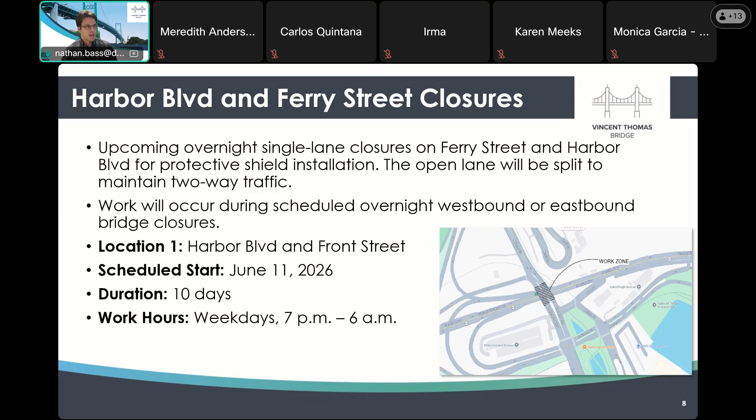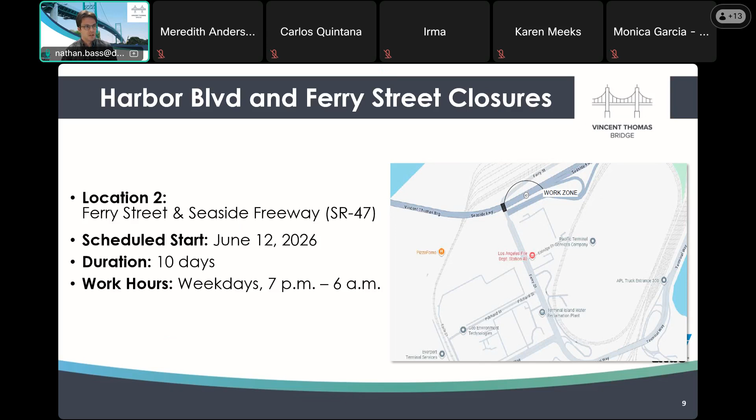The second location is Ferry Street and Seaside Freeway, or State Route 47. The scheduled start date for that is June 12th, also a 10-day duration, weekdays 7 p.m. to 6 a.m. That's for installation of the underbridge protective deck.

Tonight we are announcing the initiation of a residential air purifier program. The purpose of this program is to serve as a measure to provide community support to help address temporary air quality impacts during the bridge closure. The program is intended to provide eligible residents with a household resource during construction and reflects Caltrans' commitment to supporting surrounding communities throughout the project.

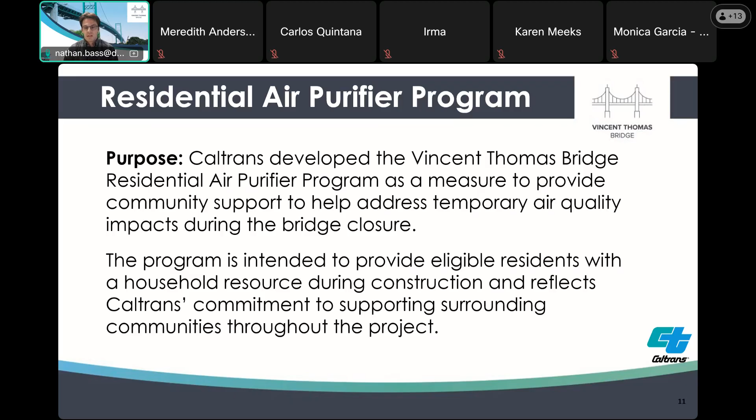The area surrounding the Vincent Thomas Bridge project is already identified as a sensitive area due to air pollution, and it's suspected that detour traffic on local streets could contribute to potentially more air pollution during the bridge closure. So Caltrans, as mitigation for this project, will be distributing or at least offering air purifiers to residents, as well as replacement filters that will last through the duration of construction, to those residents who live within a specified distance of the designated detour routes for this project.

The detour routes may increase activity on local streets surrounding the project sites, and we will provide Medify MA40 air purifiers and replacement filters to eligible residents.

On the right side of the screen is a postcard that will be sent to eligible residents, which we've identified using GIS mapping and available address data based on the designated detour route for this project. Three of these postcards will be sent out over the next several months, and recipients will be encouraged to find our project website or the registration website for this program, sign up, and pick up an air filter from our construction office, located within the project area near these neighborhoods.

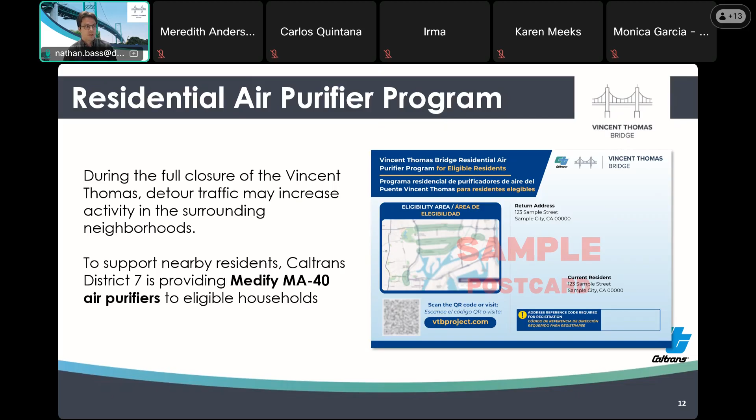Here's a map showing the eligible areas for air purifiers under this program. It is all of the residential addresses within those green bubbles surrounding the local streets and our designated detour route. The main streets that jump out are Gaffey Street down in San Pedro, and in Wilmington, Harry Bridges Boulevard, Alameda Street, Anaheim Street, Wilmington, and East I Street. Folks from Caltrans District 7 Environmental can correct me, but I believe it's about 750 feet from the detour route, which creates this boundary for eligible households.

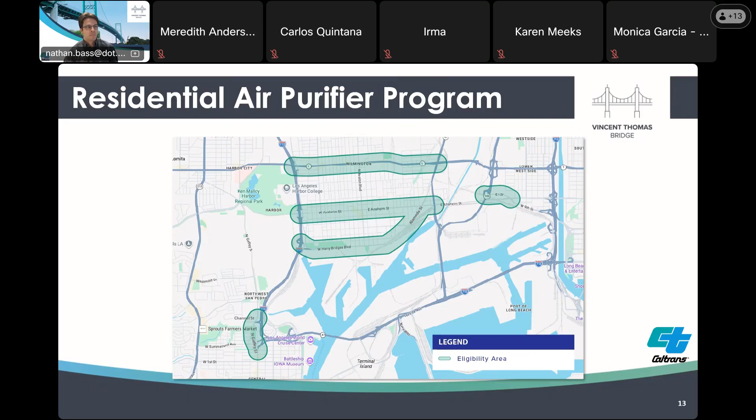So I'll pass it to Rimma to discuss the project schedule.

Thank you, Nathan. As you may remember, Caltrans launched this project in February of 2023, with the environmental phase completed in fall of 2024 and the design phase completed in fall of 2025. We signed the construction contract with Skanska CEC joint venture company this past January, and now we're fully in the construction phase. Construction work is divided into three parts: pre-full closure, full closure, and post-full bridge closure. Pre-full closure work began on March 23rd, and we are currently on target to complete it by late October this year. The 16-month full closure remains set for November 1st, with the bridge scheduled to reopen in winter 27-28. The post-full closure is scheduled from winter 27-28 through winter 28-29.

Next is Andy Chen, our structure construction senior engineer, to talk in detail about this schedule. Thank you.

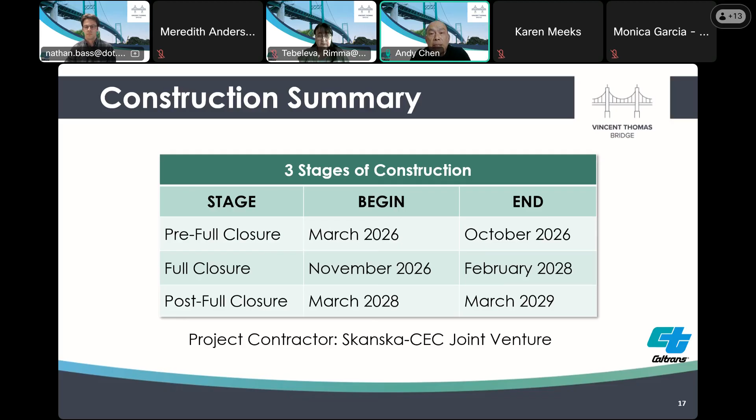Here are some of the major activities we are doing now during the pre-full closure. First, we're installing the protective shielding, which protects the people underneath the bridge and the waterway. We're about 40% finished with this item. We're also installing a work platform, which provides under-deck access for the workers. This will start around July.

We're installing 2 temporary stair towers, which increase the workers' access to the bridge. This item is already completed. For the structural bracing, which maintains the stability of the bridge, this will start next month, June. As for local road improvement, this is one of the major works for this stage. We don't have the timing yet, but we will finish this item before the full closure.

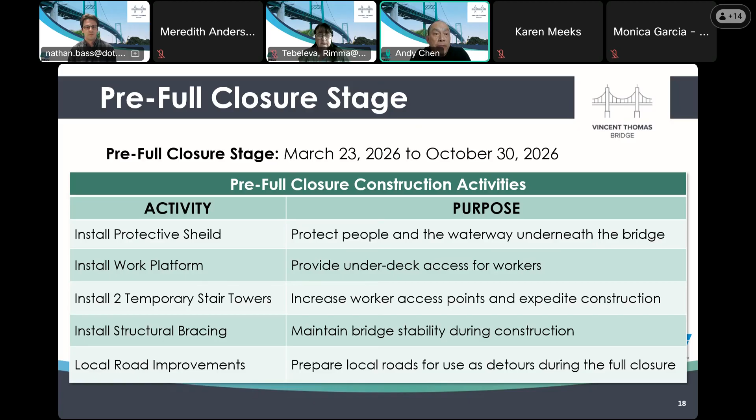Here are some of the impacts during the pre-full closure. Some of you already experienced this. We'll have overnight one-directional bridge closure from Sunday night to Friday morning. But this week we will have an additional Friday night closure, starting the week of March 23rd.

It's Monday to Friday, and westbound will be from 10:45 p.m. to 6:45 a.m., and eastbound will be from 10:15 p.m. to 6:45 a.m. There will also be potential weekend closures depending on the progress of the work. And local road closure mid-July to October 30th, 2026 — we will provide closure notification through email.

Here are some pictures showing the work we are doing right now. Those are the protective shielding I was talking about earlier. Again, we have the one-directional bridge closure, and we are doing this work during the night shift.

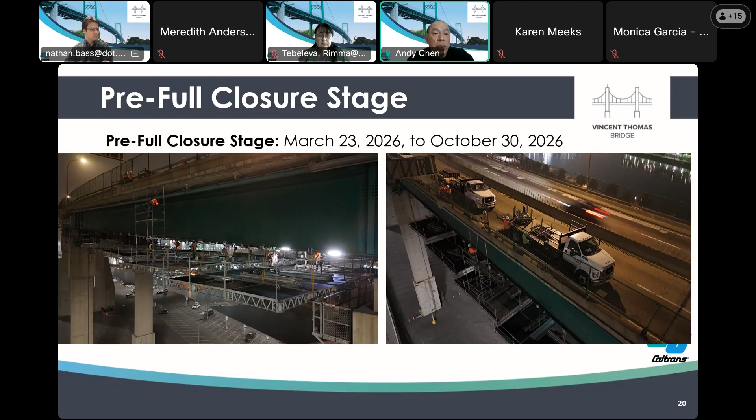Here's the sequence for how we install those quick deck or protective shieldings. First, we assemble them on the bridge deck. We lift them up until we reach a certain area, then hand it over around the bridge and install it underneath the bridge.

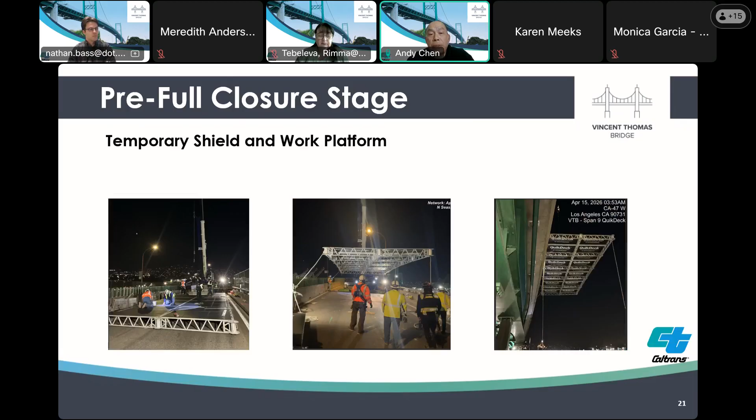Here are some more pictures about the protective shielding we have right now.

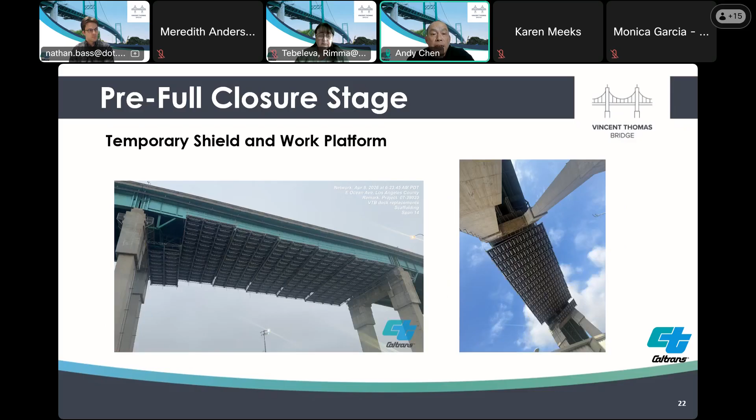And that was for the pre-full closure.

Now we're going to talk about the full closure stage. This stage is for the deck replacement. It will run from November 1st, 2026 to February 28th, about 16 months. Right now, so far, everything's on schedule.

We still anticipate we will start full closure on November 1st, 2026. Once again, during full closure, the entire bridge will be closed, 7 days a week, 2 shifts per day.

Here are the major works we are going to do during the full closure. First, of course, we're going to replace the bridge deck. We're going to reconstruct the bridge railing, reconstruct the median barrier, reconstruct the drainage, replace the seismic sensors, and reconstruct the overhead signage. All of this work will be done in 16 months.

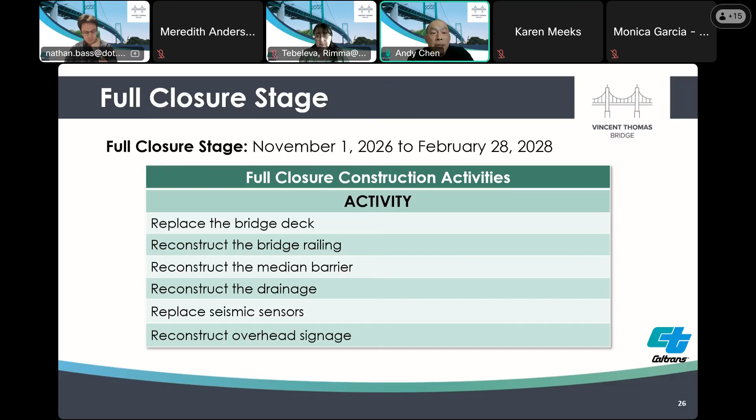And that was for the full closure. Now we are going to the post-full closure, which is the last stage of construction. For the post-full closure stage, you start from March 2028 to March 2029. There are 2 types of work: one is permanent work, one is temporary work.

For the permanent work, we're going to install the permanent under-deck utility support, and hang utilities on those supports. We're going to complete some of the punch list items and install a new drainage system at the seismic joints. That's for the permanent work.

As for the temporary work, we're going to remove all the stuff we installed during the pre-full closure stage, such as the access platform, protective shielding, stair towers, and temporary structural bracing. So those are the major work items we are going to do during the post-full closure stage. Next slide, please.

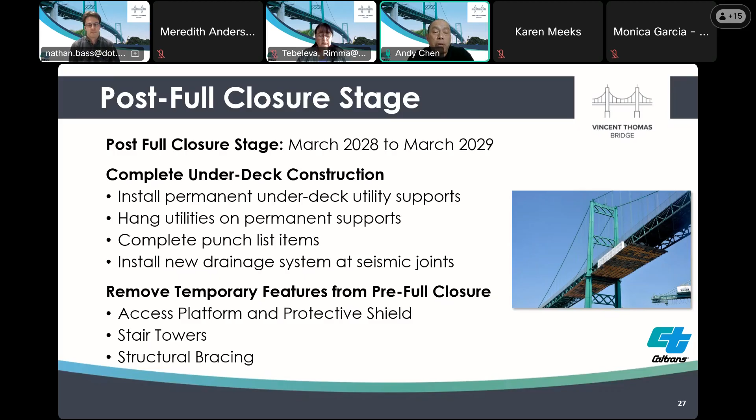Here are some of the impacts during the post-full closure stage. It is really similar to the pre-full closure stage. It will start from March 2028 to March 2029. We will also have overnight one-directional closures on weekdays. Westbound direction will be from 10:45 p.m. to 6:45 a.m., and eastbound direction will be from 10:15 p.m. to 6:45 a.m. There will also be potential weekend closures, depending on the progress of the work.

Next slide, please. So this will conclude my presentation today. I will hand the floor back to Nathan.

Thank you, Andy. I'll hand it straight over to Ken Young to speak about his work on the Traffic Management Plan Subcommittee. Thank you, Nathan. Our most recent TMP subcommittee was yesterday, and one of the items we discussed was updates regarding the westbound detour from the Long Beach side to San Pedro.

The detour was from 47 to 103 to PCH to 110, established. We do have concurrent work activities at the interchange of northbound 103 to northbound 1 regarding girder repair. It's an emergency repair project that commenced in late April and will continue through June.

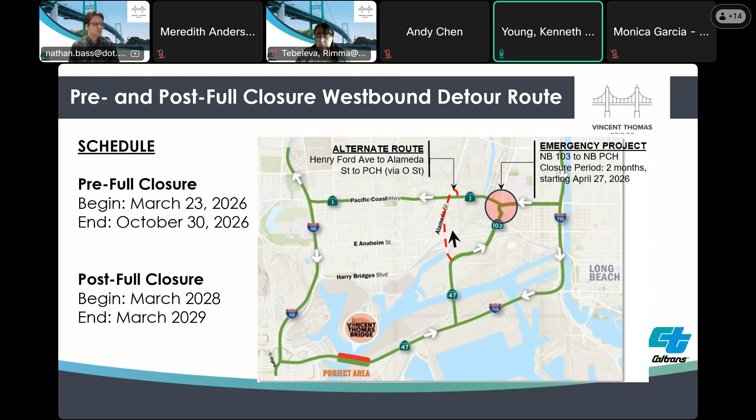Looking more closely at the closures at the interchange of northbound 103 and PCH, the access to the ramp itself from northbound 103 remains partially open. The portion from the ramp to northbound PCH is closed, and the detour to access PCH from that ramp is 20th Street to Technology Place to Judson Avenue. What's not shown here is there'll be some closure of the main line between the northbound off-ramp and the northbound on-ramp.

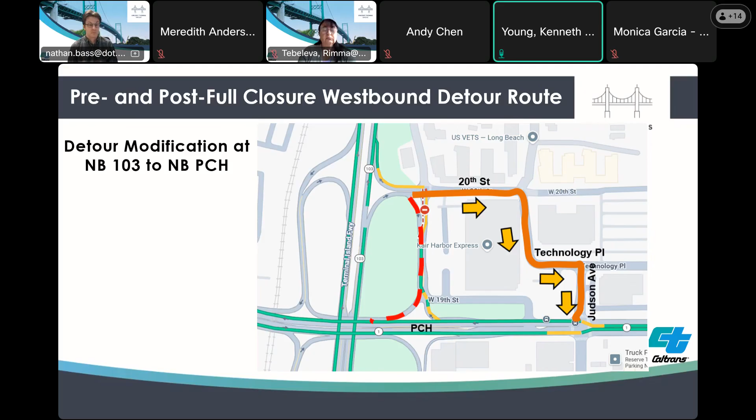Next slide, please. In terms of the eastbound detour, if we're starting from the San Pedro side to Long Beach, the detour is northbound 110 to eastbound PCH to 103, southbound 103 to southbound 47. If one is coming from southbound 110, they would go onto PCH, but should they miss it, they could continue south, and the goal is to maximize use of the state highway system.

So in this case, we would not detour motorists onto Harry Bridges until it's resurfaced. We would take motorists south on 110 to the southbound off-ramp to Channel Street, utilize Gaffey to Channel Street, across the freeway to John S. Gibson, and back north on the 110 to continue on to PCH.

In the worst case scenario, beyond that, should motorists miss that exit, they could continue south on the 110 to Gaffey and continue north on Gaffey in that same loop, so to speak, to connect onto Channel Street and John S. Gibson. So the southbound 110 to Gaffey would serve as a hard closure because the bridge will be closed, as well as Harbor Boulevard due to the Port of LA project.

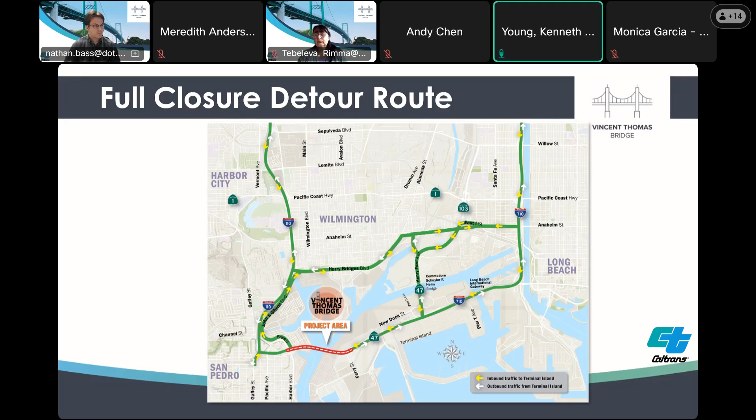In terms of traffic control officers, the plan remains relatively unchanged. The current status is the cooperative agreement is in review, and once that's approved, and ultimately the full closure timeline arrives, we could execute deployment of traffic control officers in collaboration with the city. We expect to be operating at maximum capacity, especially in the first several months, through January at the very least, when the peak season at the ports begins.

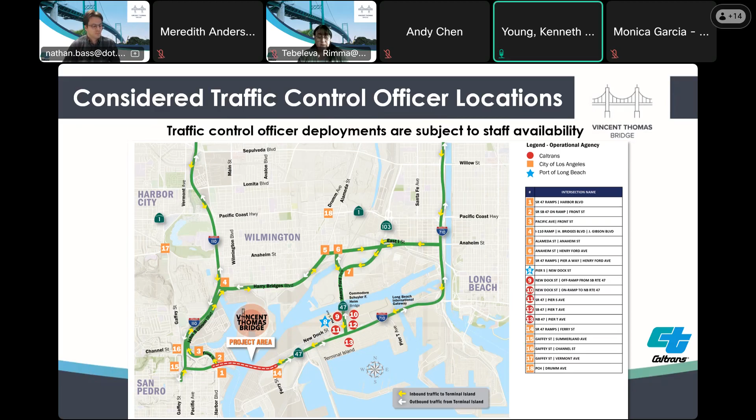Next slide. In terms of local street improvements,

capacity increase and improvements will be applied on Harry Bridges Boulevard in terms of an eastbound third lane on Harry Bridges between the 110 and Access Road, and also a third eastbound lane on Anaheim Street between Alameda and Farragut. We're also taking the opportunity to add storage at appropriate left turn pockets, in this case westbound Anaheim Street to South Alameda Street.

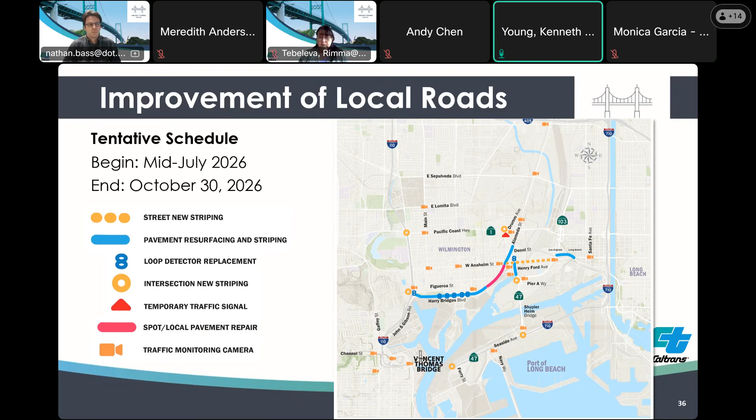Next slide. In terms of camera locations, this is also relatively unchanged from the previous meeting. In terms of existing assets on the state highway system, we're at 90% health. We have about 4 locations that remain pending, but there's an existing project that will address those. There's about 6 or 7 cameras in magenta that have largely been installed.

The remaining locations in orange or other colors will be installed once the cooperative agreement or the plans for installation can be made, once the cooperative agreement is finalized. Then we'll work with the contractor to install 6 additional locations. Next slide.

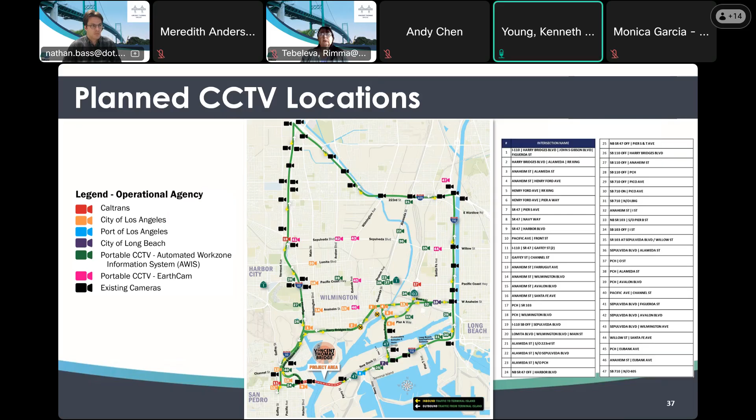Back to you, Nathan. Thank you, Ken. I'll pass it over to our mobility office to cover the project coordination map. Thank you, Nathan. Next slide, please.

Good evening, everyone. The only update we made since the last meeting was the addition of Project Z in the middle of the map, near 103 Avenue I and Farragut. This is LADWP's project, called the 3400 I Street Utility Line Extension Project, that is ongoing. I Street, as you can see from Ken's slide earlier, is part of our detour route for the full closure. Next slide, please. Thank you.

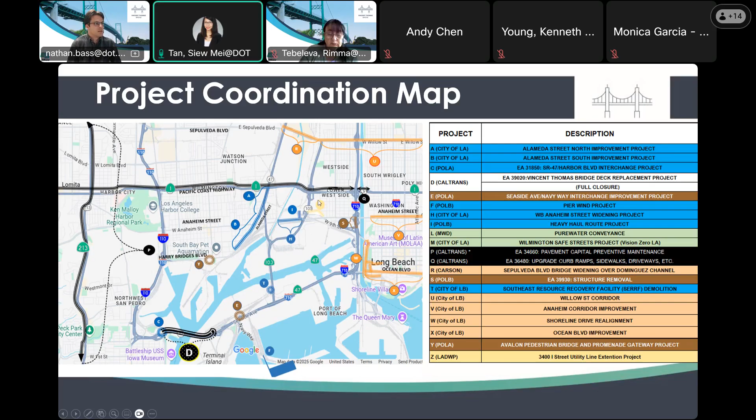And that was V like Victor, right? No, that is Z, like in the zebra. Oh, Z. Okay. In the middle, like a light yellow? I'm running out of colors, so. Oh, I see. Yeah, so in the middle, right there. Yes. Okay, thank you.

I just want to show you the schedule. Right now it is scheduled to begin, so it's not in construction yet. It's scheduled to begin in August and targeted to be completed by fall. We don't have an exact date yet, but I believe the goal is to finish this project before the full closure, to minimize conflict between the two projects. So that's the latest addition to the tracking.

The other three projects we're closely coordinating with our local partners on are in chocolate brown. Those are either along the detour routes or have a schedule that will be competing with our full closure. We've been working closely with Port of Long Beach for their 10th and 8th Street removal project, and with the Port of LA, Project E, for the Seaside Avenue Navy Way Interchange project. The other one we're tracking is Project Y, Port of LA's Avalon Pedestrian Bridge and Promenade Gateway project. So all three, we're closely working and coordinating with our partners to minimize and avoid full closure conflicts.

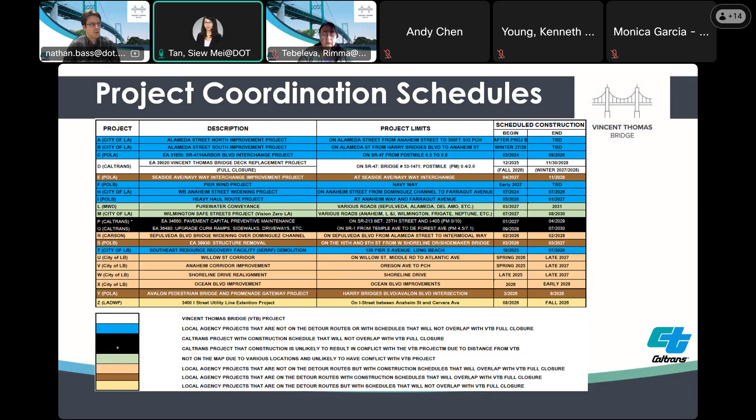No updates as to any meeting minutes from the PMSA goods movement stakeholders group meeting, but the next one will be on May 29th, and we will update you on any movement there at our next CAC meeting.